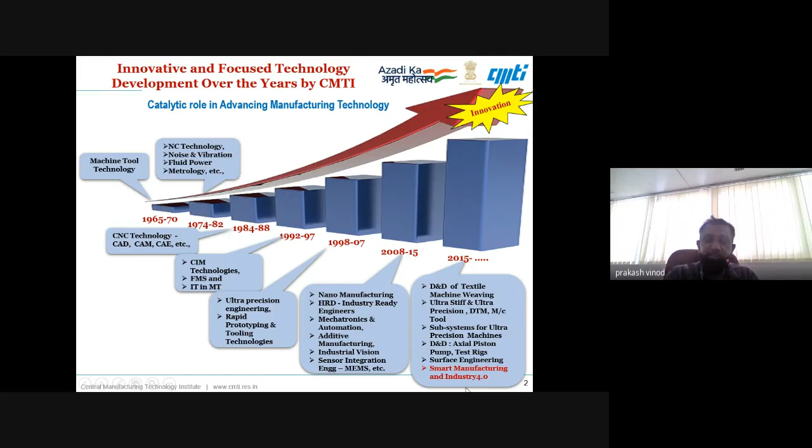To show how we are connected with smart manufacturing: our parent ministry, DHI, has a scheme called Samarth Udyog Bharat 4.0, which is part of their initiative for enhancing competitiveness in the Indian capital goods sector. Under the Samarth Udyog platform, they have set up 4 centers across India. CMTI Bangalore and IISc Bangalore are 2 common engineering facility centers of Samarth Udyog, with another center at C4i4 Pune, and another at IIT Delhi's mechanical engineering department. They are also supporting IIT Kharagpur to establish one more center, so we are becoming 5 instead of 4.

All these centers share some common goals and some specific objectives. At CMTI, we are setting up a smart factory with its digital twin for design, production, and performance monitoring of machines and assets in the domains of metal cutting, additive manufacturing, and sheet metal cutting. This factory is going to be inaugurated by the end of this year. Also, we have created a platform where development, testing, and validation of Industry 4.0 products and smart manufacturing solutions can be envisaged, and we have been doing many development works ourselves.

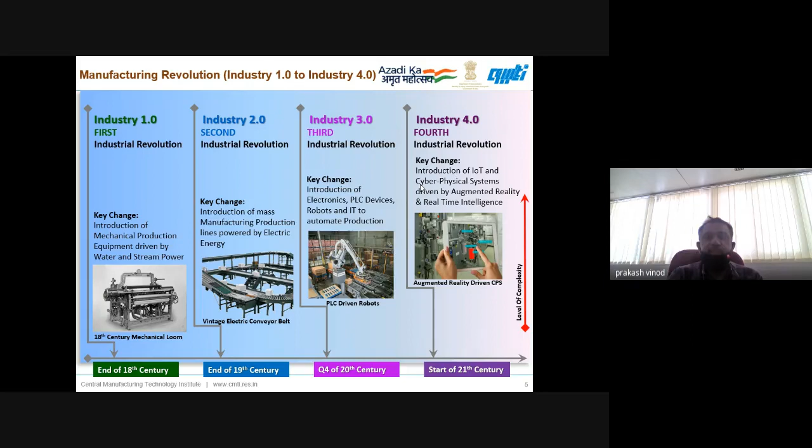So that is the thing, Industry 4.0. So what is smart manufacturing? If you look into that, what we are looking into is manufacturing, and the core of manufacturing is a factory. So within a smart factory, we have various machines and inspection systems helping us to do production, with a lot of integration among them. They are all connected to each other. That's horizontal integration, and all the assets are helping us do production which is more efficient and productive, with diagnostics and everything possible. So this is part of smart factory.

But smart manufacturing is connecting all the verticals of an organization, where the production systems are well connected with the design systems, well connected with the customers, well connected with the supply chain, and the entire thing. So in this process we get maximum benefit, where it's not only horizontal integration within the vertical, but also across the verticals there is integration. That's the way we are looking at it.

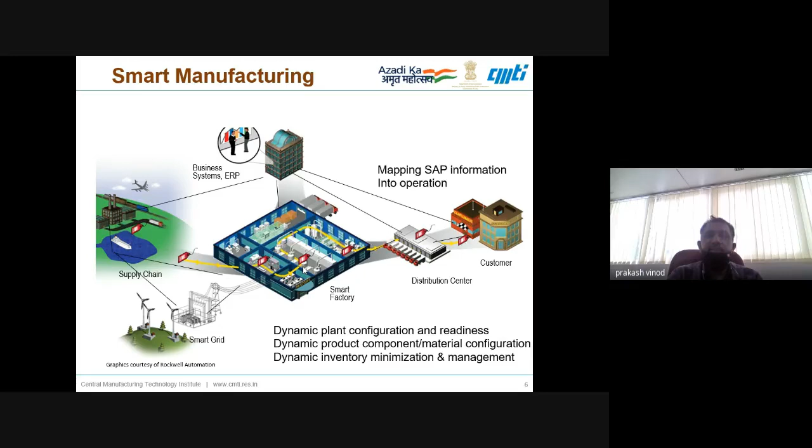So with smart manufacturing, we can achieve higher productivity, more efficient operations at lower cost, and also design-to-product turnaround time will be very less. That's the way we are looking at it, and with smart manufacturing we can face global competition. Now the arena is such that we have to face global competition, and this is possible through smart manufacturing.

Now coming to the subject I am supposed to talk more about, that is smart machine tools and machining. Let us have an overview of this. So what is a smart machine? A smart machine can be considered as an intelligent sort of device that uses machine-to-machine communication, and they are able to take autonomous decisions and solve problems without operator or human intervention. That's the way intelligent smart machines are envisaged.

Then what is a machine tool? If you see, a machine tool is one type of machine, right? But how is it different from other machines? Because in a machine tool, the machine will drive a cutting tool, and in this machine we are supposed to produce some components. So there is some raw material going into the machine, and some product comes out of the machine using a cutting tool driven by the machine. From that point of view, it is a slightly more complex machine.

So in this intelligent machine tool, what are our inputs? Basically CAD information, design information, or process information in terms of material and setup plans. And in this, we expect the machine, if it is an intelligent or smart machine, to take autonomous decisions and produce accurate components. It should also give information regarding the quality and output coming out, the machine condition, the productivity of the machine including downtime and setup times and so on. So everything should come out as output, which flows to the smart factory. That's the way we look at intelligent machine tools.

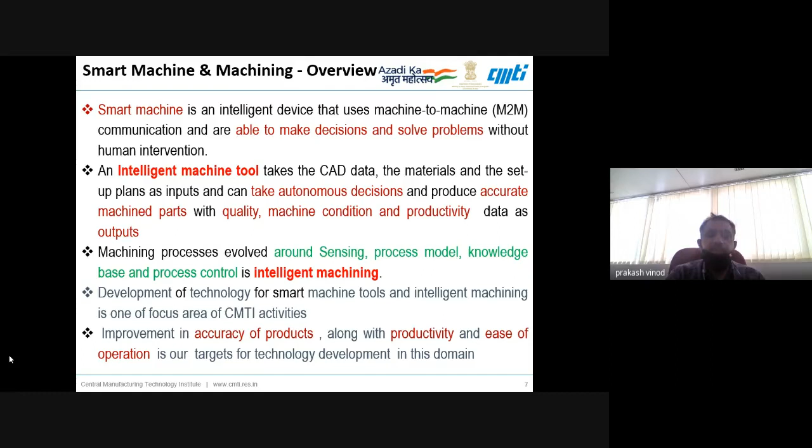So CMTI has been working in both areas, development of smart machine tools and intelligent machining, for quite a few years. What we are looking at is that not only should the machine be accurate, even the products coming out of the machine should be accurate, and the entire machining process through the machine should be productive, as well as easy to operate. Nowadays with IoT and other things, you can also make the operation quite user friendly. So these are all targets of our technology development in this domain.

So now let's see some of the features of smart machine tools which make them unique from other normal machine tools.

Including some CNC machines, a smart machine tool should adapt to changing conditions. Suppose while cutting, if chatter comes, it should be able to adapt, and either correct it itself, or give some alarm or notification to the operator to make some changes. That is the way we are looking into adapting to changing conditions.

Then another feature is that smart machine tool invariably should have open architecture CNC. Why is it required? And also sensor interface, why is it required? Because in smart machine tools, we need to sense the machining processes, and we may require many sensors, so there has to be an interface.

Some sensing is possible through CNC control itself, but if you look into the state of art technologies, in modern days machine tool OEMs will provide CNC machines with some outputs connected with power, torque, or temperature, but not considering the processes. If you want to measure cutting forces, vibrations, or acoustic emissions coming from the machining process, they may not provide that. So you must have some interfaces also, and we are looking ideally at that.

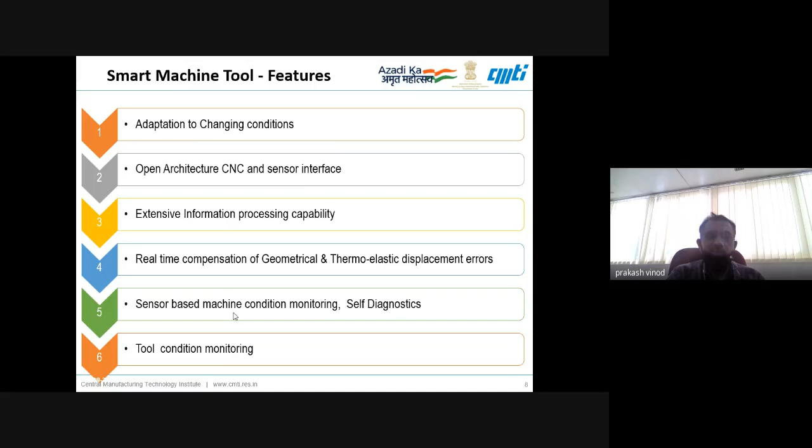Also, machine tools, apart from machine subsystems, will have cutting tools, and that is very important. If a cutting tool is becoming blunt or has more wear, it may lead to errors on the component. So cutting tool condition monitoring also should be one of the features in smart machine tools.

Vibration and chatter is invariable if you see in machining processes; every machine tool will have some stability zone. Sometimes if your tool is blunt, then you may not get the stability zone, and you're not able to work in that. So we should be able to work without spoiling the component, so we should have some means and mechanism for vibration and chatter control.

Then process monitoring, which I was talking about just now, intelligent machining based on the sensor should be possible in the smart machine tool, which is invariably not found in most of even modern day machines coming from world-class OEMs. This sensor-based process monitoring is still not fully implemented in state-of-art machines also. So it is slowly an emerging area where a lot of people are working, and I think slowly it is going to come.

Now, if you want sensor-based process monitoring and process control, we should have some models for different machining processes, where that sensor is basically input to those models, and these models are already trained.

It has knowledge, so that can help us in process control. So these are one of the features of state-of-the-art machine tools. So on-machine metrology: in fact, in machine tools we are making components, right? So generally, after the component is produced, it goes for inspection offline, and then sometimes if it needs to be corrected, it comes back to the machine.

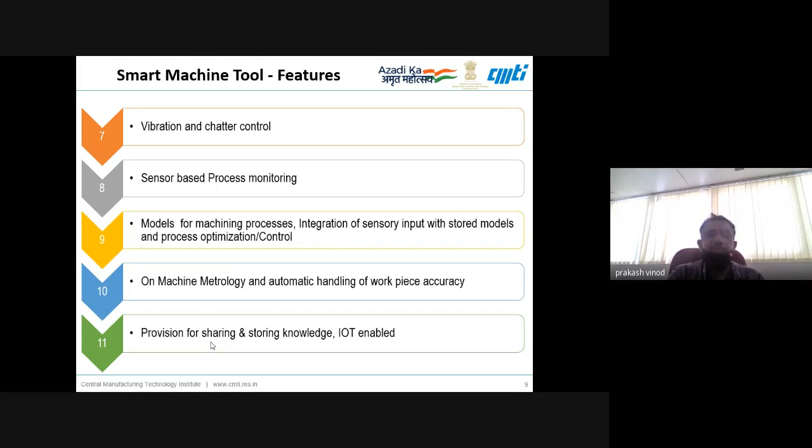So people are looking into analytics which is useful for machine tools to give real-time corrections at the edge only, that is, very close to the machines. So those features, edge controller and edge analytics based processing, should be possible near the machine. So that's the way we are looking into that.

Now let us see the smart machine tool concept, how it has come. It is not that the smart machine tool is totally different from a normal CNC machine. It is basically an add-on. So if you look into a normal CNC machine for one particular axis, maybe the x-axis, it is driven by servo motors, there are servo control drives, and there is a CNC system. So it is a closed loop system.

So if any movement is taking place for machining, it is sensed and feedback is given, and if a correction is required in positioning of the axis, that is done through the servo control. So this is servo-controlled CNC machine tools. That's the way we have been working. Now, if we are looking into a smart machine tool, we look into some more features. So let us see what features we have to add.

Now, not only are we making the machine movements closed loop, we want to make the machining processes closed loop also. So we'll have cutting processes, and in cutting processes we'll have different sensors, like cutting force, temperature, vibration. And we can also have sensors directly mounted on machines, which can be used for diagnostics. And if we are sensing the processes using cutting force and temperature, we can do process control.

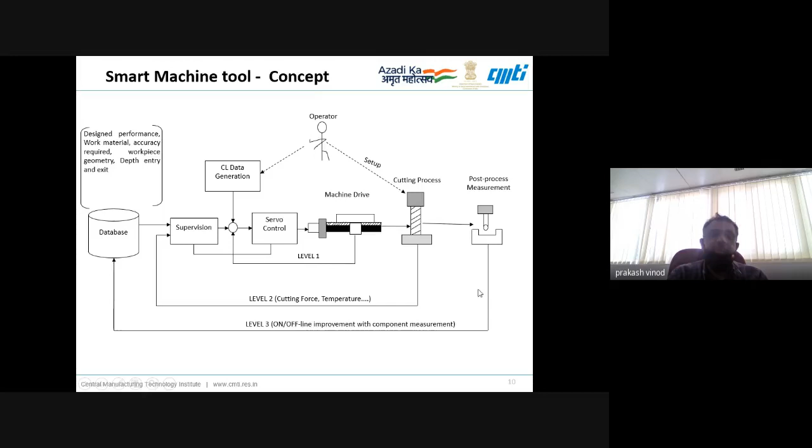We can have models which are trained and can work in real time based on the knowledge they have, and help us give corrections to the basic CNC machine. And we can also look into component measurements, the quality of the components after the process is over. On the machine itself we can check the quality, take that input, and if any corrections are required, we can look into that. So it is basically an add-on of more closed loops into the basic CNC loop. That is the way we can achieve the smart machine tool.

Now coming to CMTI, I will start with one case study, and then we'll discuss what we have been doing. CMTI developed a smart ultra precision machine tool we call the intelligent ultra precision turning machine way back in 2013. This machine itself is a very high precision machine meant for diamond turning and producing optical quality surfaces on metals. But at the same time, we also developed many technologies which make the machine tool smart. So let us see what those are.

So the first one is machine error. I was mentioning that the machine will have inherent errors connected with positioning of various axes, geometrical errors like straightness, pitch, yaw, and roll, which make the machine inaccurate. The machine will also have thermoelastic displacement errors, which occur because of temperature changes, because machines are made mainly from steel alloys. So invariably it has a comparatively higher coefficient of thermal expansion, which leads to thermoelastic errors.

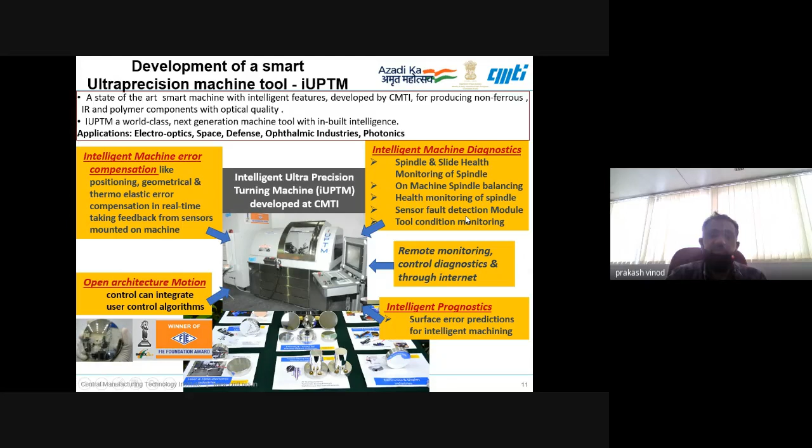The first thing we did, we developed a module, again an AI/ML based technique, for surface error predictions for intelligent machining. I will be discussing these in the coming slides. Now, if you look feature-wise, we had an ultra precision turning machine, and if you see some of the features, you will find them very unique, not found in other machines. Like the type of drives, linear motor driven, aerostatic spindles, and the machine structure is made of granite. Of course, the slides and other things are made of metal, but the machine is isolated.

Many sensors are mounted on the machine. Job holding is basically through vacuum. The coolant system is also unique; it is mist coolant. So many features are there in that machine which make it a high precision machine. But apart from that, let us look into the intelligence part.

As I mentioned, we can do real-time machine error corrections and real-time diagnostics. Some prognosis using intelligent machining, and even some prognosis of the tool, particularly tool life, we have done. And of course, the machine has features for active vibration control and adaptive control. Then I will just quickly go through how we have done these works.

The first part is positioning error or geometrical error compensation on this machine. These positioning errors will occur in your linear axes basically. This is a hard turning machine, and the next one is our diamond turning machine. These will invariably have two axes, X and Z, and sometimes the spindle will also be a C axis. So we have to look into the errors of all these axes. Let us look into the error of a linear axis, where we can correct this positioning error.

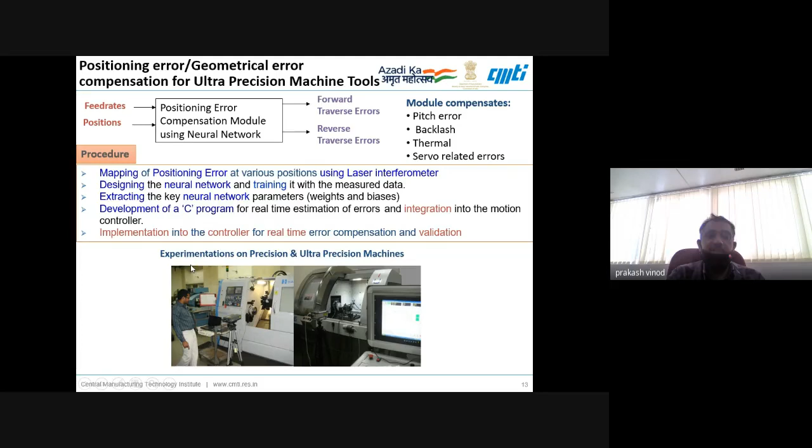It can start predicting the errors, and that can be corrected using a C program, which can be integrated into the motion controller. So that is the way we are looking into that. We have done it successfully, and we have achieved some results, which I will be sharing with you in the next slide.

So let us see. This is geometrical error correction of one of the axes of this machine, in real time, using basically an NN-based algorithm. The neural network is one of the artificial intelligence algorithms which we can use for industrial applications.

So let us see the linear error, that is the positioning error. If you see the blue one, it was before correction. Of course, it is an ultra precision machine, so it was around 4 to 4.5 micrometers for that stroke of around 200.

Now, after the development and implementation of the neural network-based algorithm, we are able to achieve less than 100 nanometers, less than 0.1 micrometer error in position. This is real time in this scenario, and it is after validation.

Like that, the machine will have geometrical errors like pitch, yaw, and roll. These are angular errors. Apart from that, it will have straightness error in the vertical and horizontal direction. Everywhere, the blue one is before correction, and the red one is after correction.

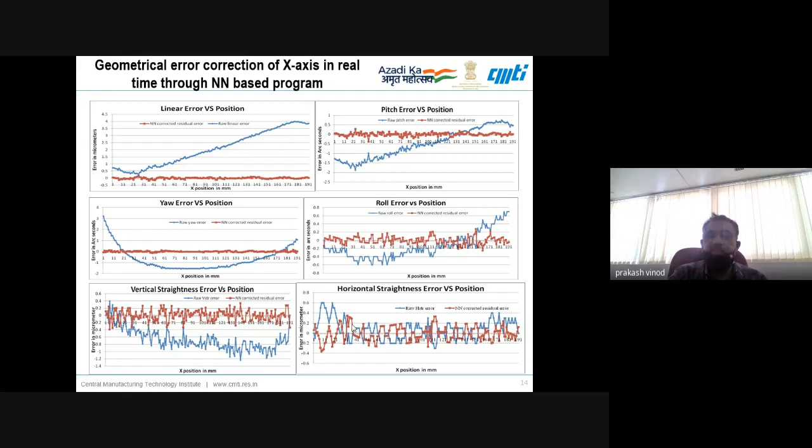So if you quickly look into that, not only the linear error, but also the angular errors like pitch, yaw, and roll, and the straightness error in horizontal and vertical direction, with the implementation of these algorithms in real time, we are able to bring down to hundreds of nanometers level. So that is one of the achievements we have done in our machine.

Now let us look into thermoelastic errors. Thermoelastic error is a big problem for most machine tool OEMs, particularly in a country like India, where the temperature changes from winter to summer and place to place. It goes sometimes from 0 to 44, 45 degrees centigrade. With this large variation, you can expect the machine will give you inaccurate parts in different seasons, different conditions and different places.

Same machine. So we can definitely correct it, and this is one of the techniques which is very useful in real time. By using electronic means and again artificial intelligence and machine learning techniques, we can develop an algorithm, and in real time, based on the temperature of the machine at a few places, not at all places, we can correct the error occurring between tool and job, and we can get the results.

So if you look into this flow chart, what we need to do is a lot of experimental work initially to identify which are the correct locations. We have to do temperature mapping, and with temperature, we have to do mapping of the thermoelastic displacement during experimental work.

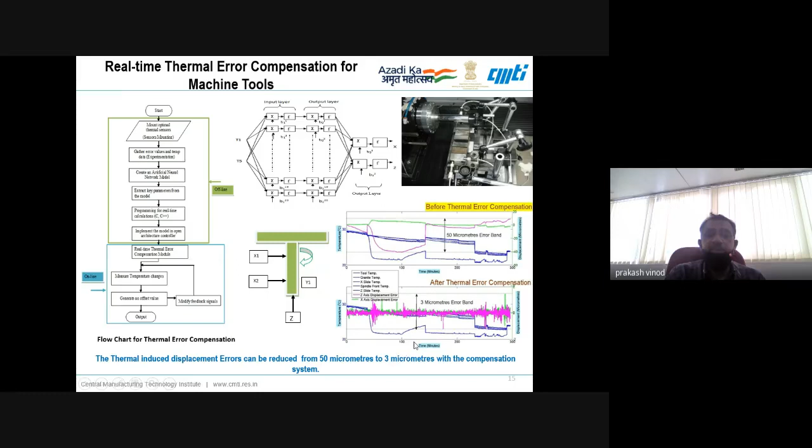We have not only validated this, we also implemented it into our machine, one of the machines. Let us see the one component where the radius we are machining, some spherical cup sort of thing, on a continuous basis.

The radius tolerance was only 1 micrometer. 3.288 is the basic dimension, and tolerance is 1 micrometer only. The form error of this spherical shape was 1.2 micrometer. So what used to happen?

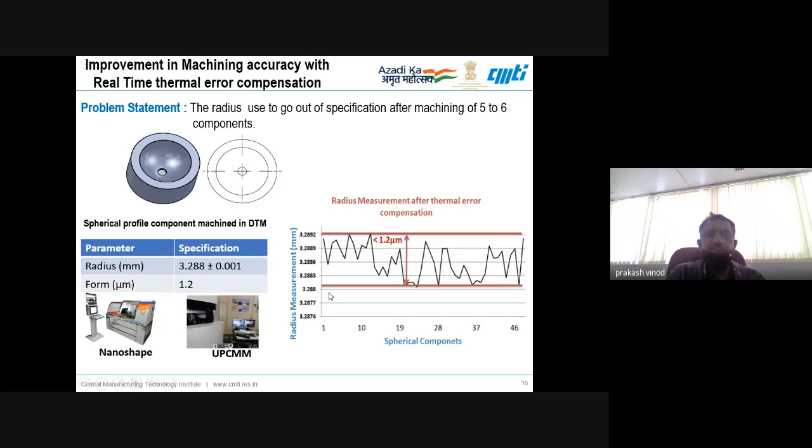The radius was changing. After 5-6 components, it was going out of tolerance before implementation of this thermal error compensation technique. Once we implemented it, as the thermal errors come up beyond some threshold value, correction takes place, and it maintains that. So after 46 components also, you get the same band. That is the validation, this real-time experimental work after implementation.

So the next one is monitoring of machine and diagnostics. That is very important in smart machine tools. Machine tool will have elements like spindles, slides, and all. These need to be monitored in real time, the conditions and all. So how can we monitor?

The best way is that you can monitor using a vibration sensor. If you have a vibration sensor, you can find out the real-time vibration. Of course, you should also have some reference levels. You can compare these vibration levels with the reference level, and if the values go beyond a certain level, we can have alarms to the operator, and if we work further on that, we can predict the life of the machine element. So prognosis is also possible, not only diagnostics.

So that's the way we are looking at it. We have developed some modules where, for each measurement point on the machine, we have a reference level. When the machine was good, we recorded a reference level, meaning it could be a single value parameter like overall vibration level, or it could be a vibration spectrum itself in a particular band. Those reference things are there with us, and in real time we have vibration sensors mounted.

With that we are able to get information in terms of real single value parameters like overall values, crest factor, or peak level. These type of things we get, and we compare with the reference values, and we are able to tell whether it is good or bad. Fortunately for this, we have some standards also, international standards, which tell when it is good and when it is bad. That's why we are doing that.

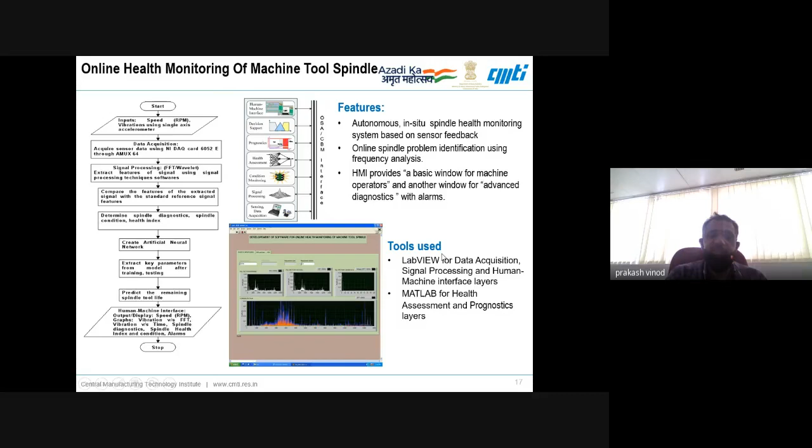Now coming to this, this was regarding very smart state-of-art machines developed by OEMs including CMTI. But what about machines which are already there? I think this is one of the tasks given to the Samarth Udyog centers. We have plenty of machines from industry 2 generation and industry 3 generation. So how to make them smart? CMTI has done a lot of work on that.

So what we have done, let us see one machine. It is a 5-axis VMC from the 1970s, somewhere 75 or early 80s. This machine was procured at CMTI. It doesn't have a controller, a very old CNC, so you cannot tap any data or information from the controller. It is doing closed loop operation fine, but you cannot take any information out of that.

So then what to do? In that, we have incorporated external sensors like temperature, vibration, pressure, energy and all this. We have also put a vision-based inspection system for quality inspection. With that, we developed edge-based analytics and cloud-based analytics, and we created a cloud-based dashboard.

There we can monitor the thermal behavior, spindle health and axis health, that is machine health, temperatures, and energy. Energy monitoring is also very important because nowadays it is not just useful for productivity, it also gives a lot of information regarding the process.

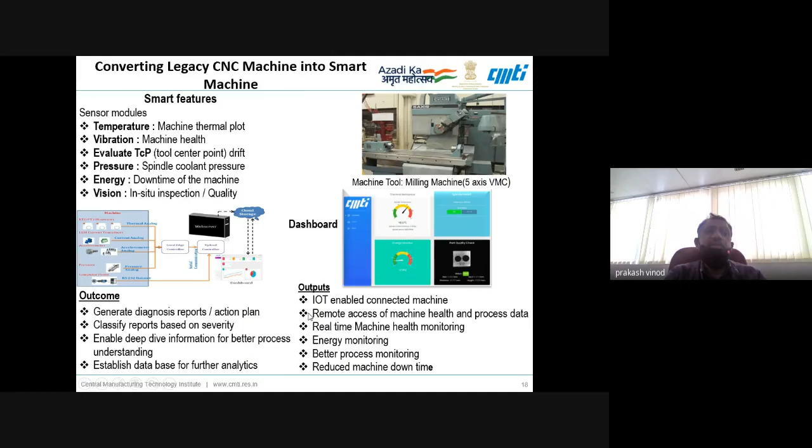We also looked into not only metal cutting but additive manufacturing. A lot of additive machines are there which are again, we can call, some sort of legacy because they are not IoT enabled. So how to make them IoT enabled? We have done some work in that area too.

We created some apps and all. Using the app, through cloud, we can upload our program G-codes for the manufacturing process, for additive manufacturing. We can do that, and also monitor the machine through the cloud. So that's all a possibility, and we have done all this.

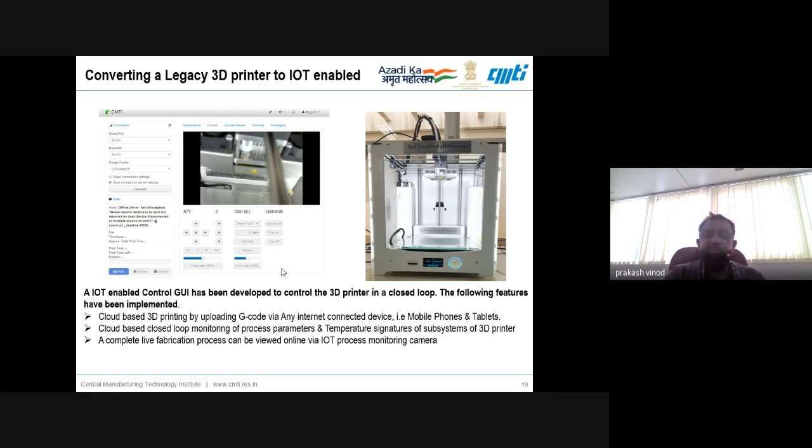We have added some sensors also, and we can monitor the process through vision systems also. Apart from monitoring process parameters like temperature for additive processes, we can see some dashboard for the 3D printer. It's an FDM printer basically, so it's like a technology demonstrator.

We have done that. We are able to maintain and monitor temperature and humidity inside the chamber, and temperatures at different places and all. So this thing we are able to do.

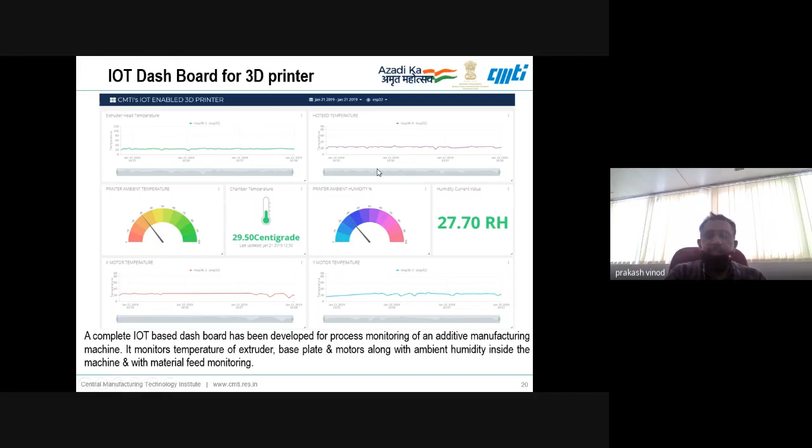Now coming back to this, what is the role of this smart machine in a smart factory and Industry 4.0? Let us see. When we look into a smart factory, there is networking of people, and as I told you, the machine and resources, all cyber-physical, this is all fine. But the core of this smart factory is the machine.

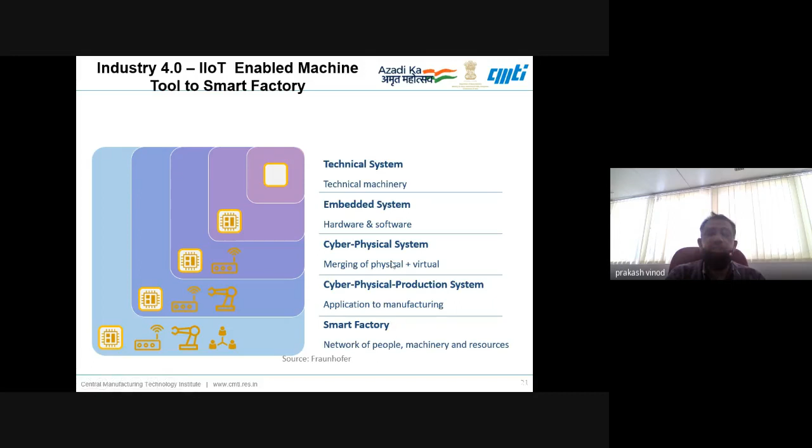When we talk of a machine, we have to look into a physical machine, a virtual machine, and see that the machine is IoT enabled. It should give information about what is happening on the machine and also why it is happening, and it should be able to do adaptive control and prognosis. This is the core of the machine tool, the core of many smart factories based on metal cutting.

So this is the first part, I think, regarding the smart machine tool. Now later I wanted to talk on intelligent machining. If anybody has any questions, I can take a break and answer the questions.

Hello. Hello. Yes, Dr. Prakash. Yeah, yes, I think if anybody has any questions, I can take up on the machine tool, smart machine tool, yes sir, or Industry 4.0 and smart manufacturing, and then I can proceed towards the machining, intelligent machining. Sir, there is one question from Dr. Ramchandra Krishnaswamy. Yes, sir, yes, sir.

How is the online balancing carried out while a machine process is in progress? So actually, sir, I think I have not given much detail. What we have developed, it is not that while machining is happening, the balancing is done. It is before machining, using the module. Once you take a machine tool, you will have some fixtures, a spindle and some fixtures, right sir, or some job also you can mount on that. So before you start the machining process, we can check the unbalance on the machine using the module, and we can check the unbalance and correct it before the cutting. Yes sir, hope that answers this.

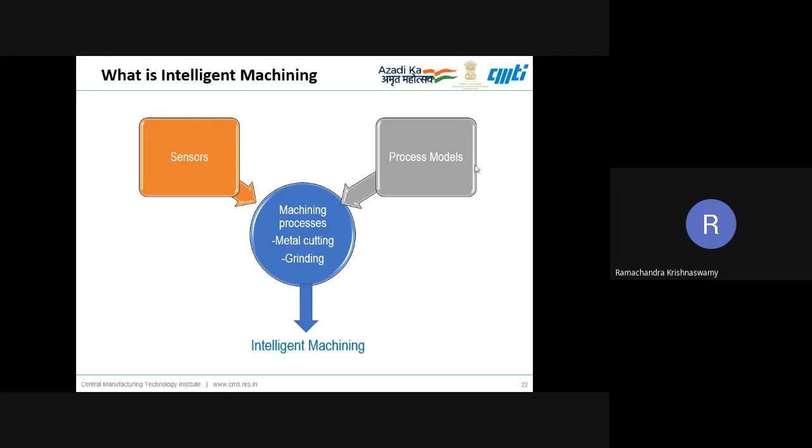Professor Ananthasuresh has a question. Sir, please. So Dr. Prakash, I think it was a very lucid presentation. You started from the very basics about defining Industry 4.0. That was very nice.

So I have a question. When you look at Industry 1.0, 2.0, there was a very clear demarcation. 1.0 you said was steam power. Second is the 2.0, electrical power. So can such a clear, crisp distinction be made between 3.0 and 4.0? Okay, that is the first question.

Yes, definitely sir. So the clear distinction is that in 3.0, machines are basically autonomous and automatic, but they are standalone. Standalone in the sense they need not be connected to each other. In Industry 3 also, a robot was assisting a CNC machine. But if you look into Industry 4, all the assets, the robots, the machine tool, inspection systems, CAD, CAM, they are all connected, sir, well connected.

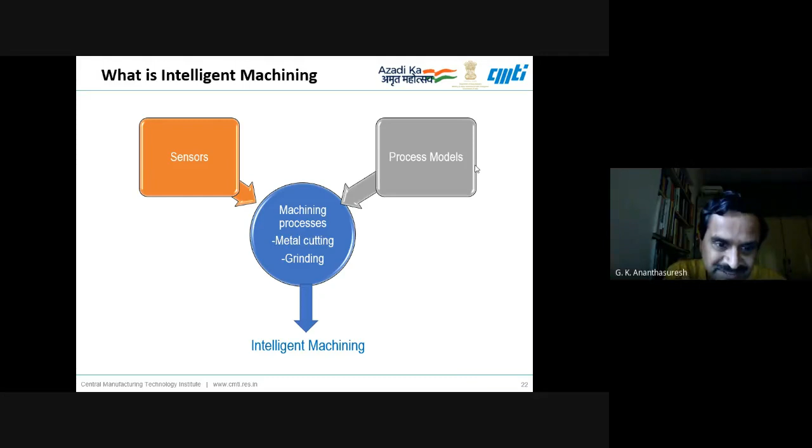In a similar way, I think that change probably will be coming, but right now, between 3.0 and 4.0, even though we can explain in detail what the differences are, I think probably we need some more time for seeing this very clearly. So to specifically ask a question, if you go to your slide number 10, where you had a flow chart, right? Slide number 10, if I noted it correctly. Yeah, I will come back to that.

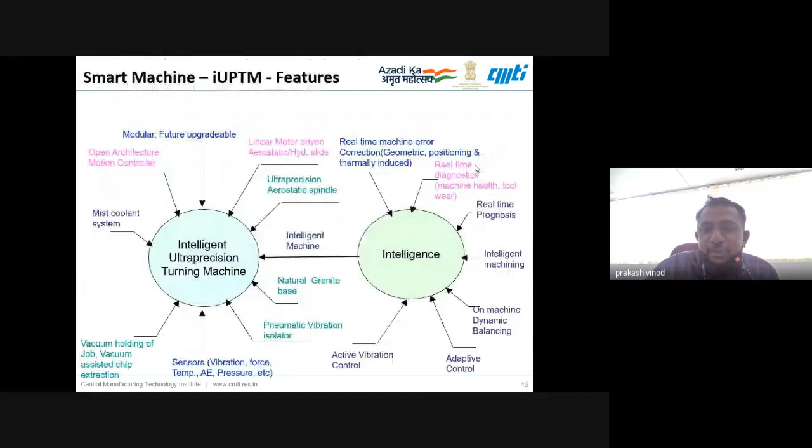I think so. Now slide number 10 - if you were to make it a 3.0 type system, what connectivities will be disappearing from here? This is now 4.0. So for 3.0, which ones will go away? The cutting process and then process monitoring will go. This servo control and CNC is level 1. Level 1 will still remain, sir.

So this cutting process part will be disappearing. Yes, sir, entire cutting process monitoring, including the model, will disappear. And also the measurement on-machine methodology will disappear, sir. The database also, I think, is disappearing. Most CNC machines in generation 3 will not have a big database or any supervisory model. It's basically a closed-loop CNC, where it can correct axis positions automatically. That's the way it works, sir.

Is it fair to say that cutting process modeling was not done until 4.0 came in? That's what everybody says. But cutting process was being monitored, and post-process measurements were being taken. To clarify, sir, although we wrote cutting processes, at level 2 we are not only monitoring cutting processes, but also monitoring machine parameters like vibrations and temperatures. That is not shown very clearly here, but basically at level 2, we are monitoring the cutting process as well as on-machine monitoring. So both are going, sir. In case of Industry 3.0, that monitoring of process as well as machine diagnostics is going away, sir.

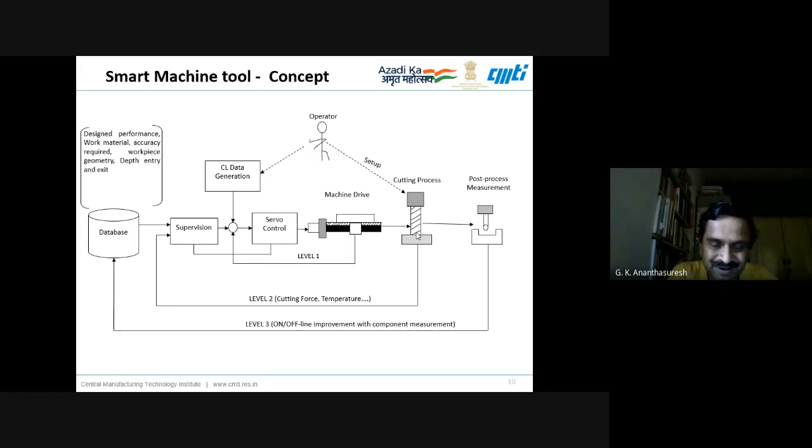Okay, again, I think some of these were done. So that's why I'm saying between 3.0 and 4.0, the distinction is a lot more gradual, elaboration-wise. It's obvious. You're very much right, because if you look into 3 and 4, in 4, 3 is going to be there by default. So it's gradual - it's not like the big difference you see from 1 to 2, steam to electrical, and electrical to electronics. But here it is electronics to software. That's a very crisp way of saying it - yes, software is more, all electronics. Now 4.0 takes software. True, sir, true.

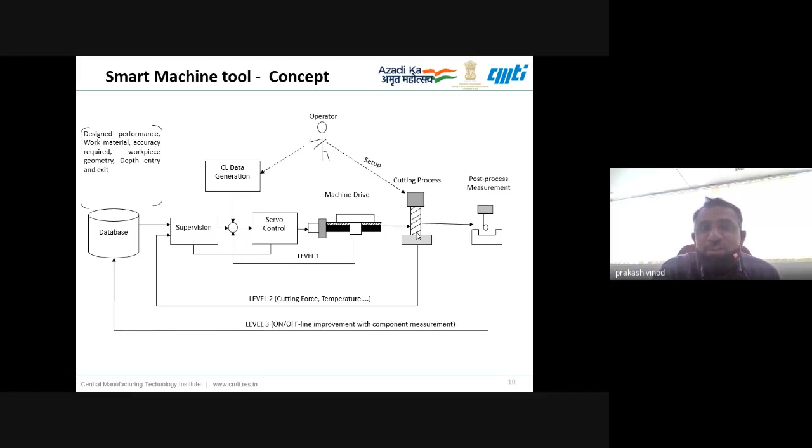Okay, thank you, very nice. Thank you, okay sir. Yes, sir, any questions? No, sir, no one has kept it in the chat box.

Then I will come to the second part, which I think is much more futuristic. Just now I was talking to Professor Ananthasuresh regarding intelligent machining. If you look into the first part, smart machine tools and diagnostics - to some extent, cloud-based techniques and analytics make it possible to see what is happening on the machine elements, very well. Nowadays machines are coming as Industry 4.0 compliant machines. If you buy from OEMs even in India, people are coming out with machines where you can see what is happening in the machine, definitely in the machine elements. But if you look into the process - what is happening in the cutting processes - that is still not fully implemented in industry.

So it's quite interesting from an academic point of view, and a lot of work is happening in academia. I'm just putting some things that CMTI has done - more work is happening in academia. So now let us see what intelligent machining is.

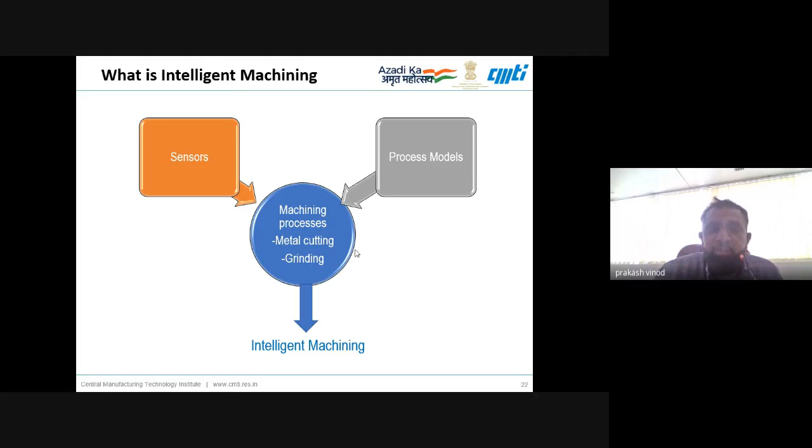Let us see, it is a big challenge for metal cutting R&D guys. So now, why actually is it so difficult, and why is intelligent machining required? We will see both. Machining processes, as on date, are open loop as well as stochastic.

Sometimes suddenly there will be chipping of the tool and all sorts of things, tool wear and all. If you look into it, you will find that these are basically non-stationary. It's not really a stationary phenomena, and there are many things resulting in affecting the machining processes.

So it is not only the tool, it is also the job — the job hardness, uniformity in the hardness or composition of the material, also the tool, and the machine itself — machine vibration, spindle vibration, axis vibration, many things, and even coolant and lubrication. So many things are there which are finally making the product, and that's why it is much more challenging.

Secondly, why it is required is that machine tools are very expensive, and nowadays in industry 3.0 itself it was automatic. Now with IoT and all, it is much more a smart factory, and people are talking of even integrated inspection on machine, metrology, and all sorts of things, with very less human intervention. People are talking of operating factories without man, smart factories. So this is why it is very important.

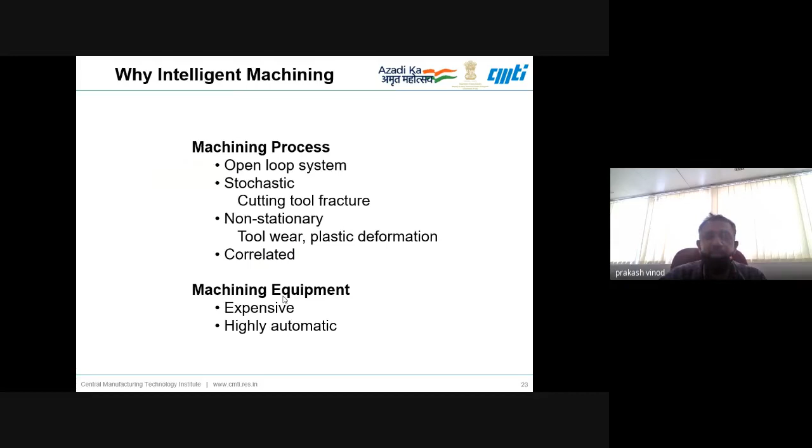So some of the issues we look into when talking of intelligent machining, for any type of metal cutting: wear of tool or grinding wheel, fracturing of tool, plastic deformation occurring in the tool itself, temperatures occurring at the tool and job interfaces, vibrations, chatters, chip formation mechanisms, and thermal issues which are also affecting the machining process.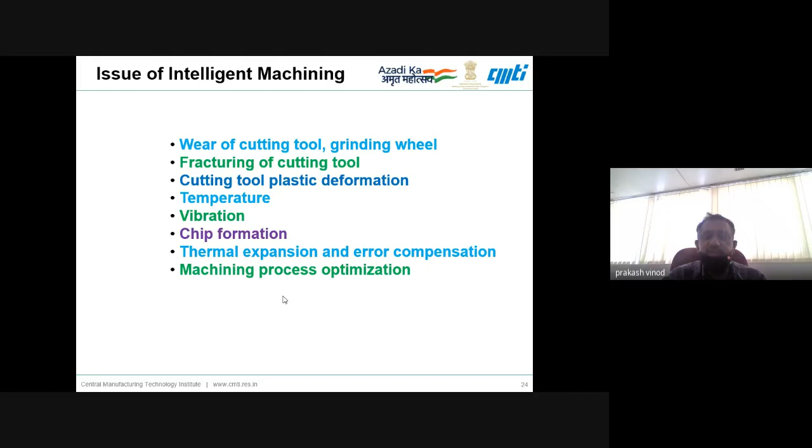Finally, we have to look into the aim of all this — intelligent machining — to optimize the machining processes. Also, we should be able to predict the prognosis of the process. That is the aim. Now let us look into the basic things.

I am not going to talk much in this area, just a few basic things regarding what sensors we can use for intelligent machining. Now if you see, cutting force is the most common sensing used in metal cutting to sense the process.

So there are other sensing elements or basic sensors like force sensing, vibration sensing, acoustic emission sensing, and sometimes some processes you can monitor using vision-based systems also, or displacement measurements, and sometimes current, voltage, and power.

Nowadays, as you have seen, a lot of solutions are coming in using monitoring of power, meaning energy monitoring. I think invariably we have to do it as part of any Industry 4.0 solution, because that will give you the power consumption. You can optimize the power. Power is very costly, so invariably people do energy monitoring.

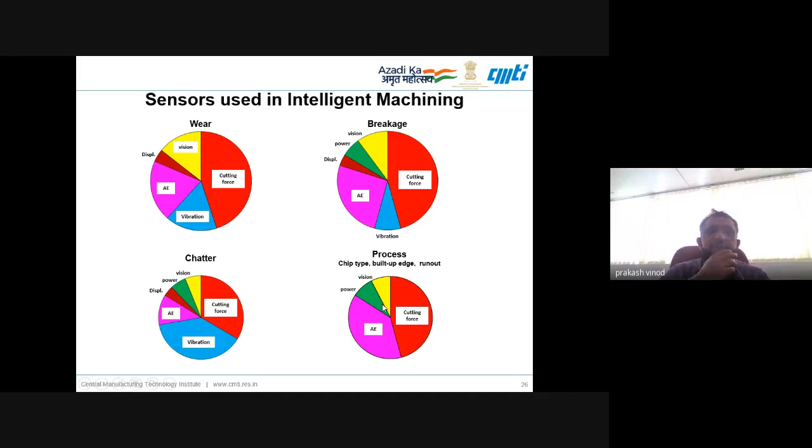So now let us see what are the basic types of errors, a few errors, and which sensing will help us. If you look into tool wear monitoring, the modules which people develop, the majority come with cutting force, and some come with vibration and acoustic emission, quite a good amount, and some are vision based, where they can directly measure the tool wear. So some solutions are there where people are working, or they have come out with some prototypes.

Now when it comes to chatter, chatter is easily detected with vibration. So vibration and cutting force are the two important parameters by which we can look into chatter. When it comes to tool breakage or chipping, as we all know, if a tool has some chipping or breakage, the cutting force will suddenly change very drastically. So cutting force based models are much more popular.

When it comes to some high-end processes, like built-up edge formation or chip formation, cutting force and acoustic emission are found to be much more useful than other methods. Of course, everywhere you can see power; I think this is slightly older, from a few years back. But nowadays, even though they are not finding a foolproof solution, people are trying to give solutions based on power for all these issues.

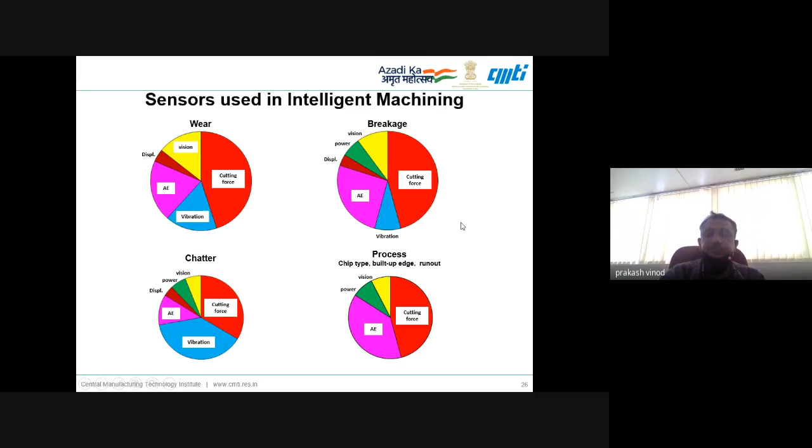Okay. Now, coming to the development of a module for intelligent machining. I've tried to make it very simple for people to understand, but it is really difficult if you want to achieve good results. So let us see how we go about intelligent machining, how we are making it a closed loop system. Basically, as usual, we have to monitor the process using sensors. Once we are monitoring using a sensor, like a vibration sensor for example, some data will come.

But the raw data itself we cannot take. The reason is that we are trying to monitor the vibration from the cutting process, but vibration can come from the machine itself. There could be a bearing problem or some other issue, or environmental vibration can also come in. So we must do some filtering. We should know filtering techniques very well and apply them.

Then from the information that comes after filtering, we have to extract the features. The basic raw information is going to be very huge, so we cannot manage that for proper learning. So we have to find out which features can be used from the entire raw signals, and use them in some sort of ML-based or AI-based modules we develop, and then do training using the information extracted through feature extraction from the data. Then we have to do some learning.

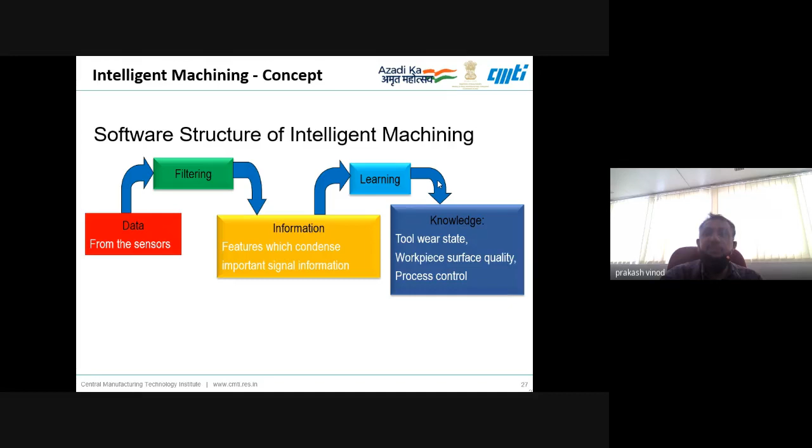It can help us to either change the cutting conditions, or at least it can give us some information regarding process prognosis, some alarms, some dashboards where we can know the wear, we can know surface quality; at least we can see and visualize. Later, once we are very sure that things are working well, we can use it for adaptive control automatically. So we have to be very careful.

So the same thing, there is a basic manufacturing process, turning here, and so on. Some signal will come, then we'll have to extract the features, and based on that we have to do some decision making, which is AI/ML based, and then find out which are faulty, which are normal, and that is the way it works actually. Then we have to put it into the control system, and then it works. So this is the general structure.

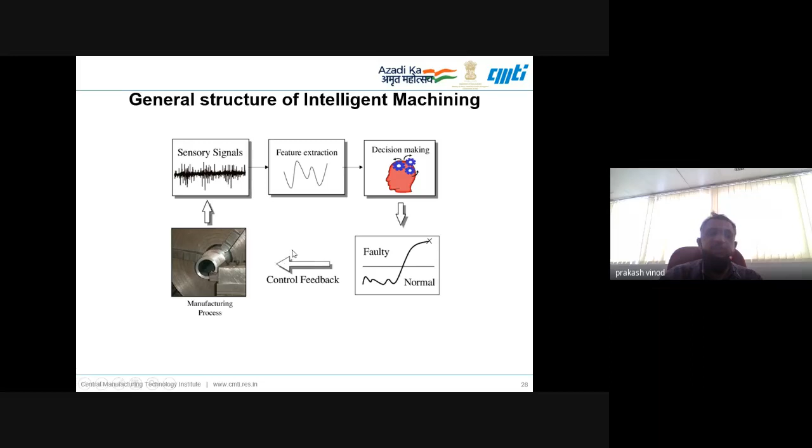It's very simple to make, but once we are looking into specific processes, if you want to monitor or predict the type of wear, or some tool life, or process quality like surface roughness, it is very difficult and challenging to prove and validate that it works in all conditions.

So now I will just take one example which CMTI has tried to do. Let us see. We tried to predict the surface roughness in the diamond turning process. What we did, we did some design of experiments and all, which I will not go deep into. Basically, we had a diamond turning machine, our intelligent ultra precision turning machine.

We have fixed the workpiece size, and some targeted surface finish. We are planning 10 nanometers, and the speed range of the machine is 50 to 7,000 RPM, and the load capacity. These are the basic specifications of the machine. Then we selected a particular type of shape, which is flat, and the material is aluminum 6061 T6, the optical grade aluminum.

So we tried to develop the module for predicting the surface finish. The tool also we fixed, a monocrystalline diamond tool with 0 rake angle and nose radius of 3, based on some literature. Then we started measuring the vibration in 3 directions, X, Y, Z. We were monitoring the vibration from the tool side, not from the spindle side.

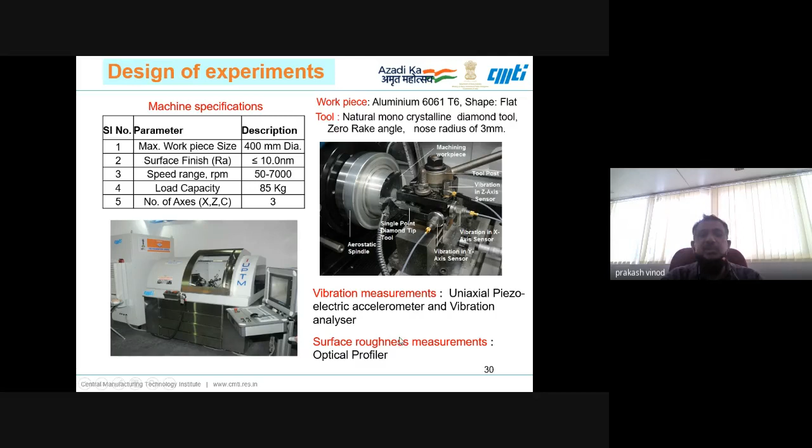And then finally surface roughness measurement. Based on the design of experiments we have done a number of experiments, and the surface roughness measurement was done using our optical profiler at CMTI. So let us see what is the input and what is the output.

The independent variables are the cutting speed, feed, and depth of cut, and also the vibrations which we are measuring in the tangential cutting force direction, feed direction, and thrust force direction. That is Vx, Vy, Vz, vibration only. So these 3 plus these 3. And finally we are getting a component and surface finish.

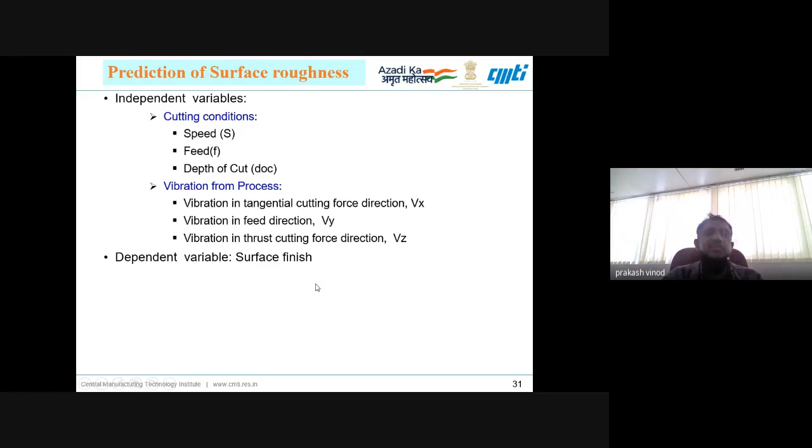This information we have used to try to predict the surface roughness using 2 methods. One is multiple regression analysis, another is an artificial neural network based module. If you look, the blue one is the real. After validation and implementing this into our machine, we did 25 further experiments, and in those we compared what we are measuring and what we are predicting.

We tried to predict using two techniques, regression analysis and ANN. We found that the ANN-based model was giving a slightly better fit to the measured one. The error was around plus minus 6%, whereas in the case of MRA it was around plus minus 12%. So that's the way the goodness of fit was there. Reasonably, it gave a good indication that it is possible.

But again, as I told you, it is for one particular shape. If the shape is changing, the cutting tool is changing, and the material is changing, then we have challenges again. So we are still working out how to make some sort of robust model for diamond turning itself, and then comes the turning of other processes. So it is quite challenging.

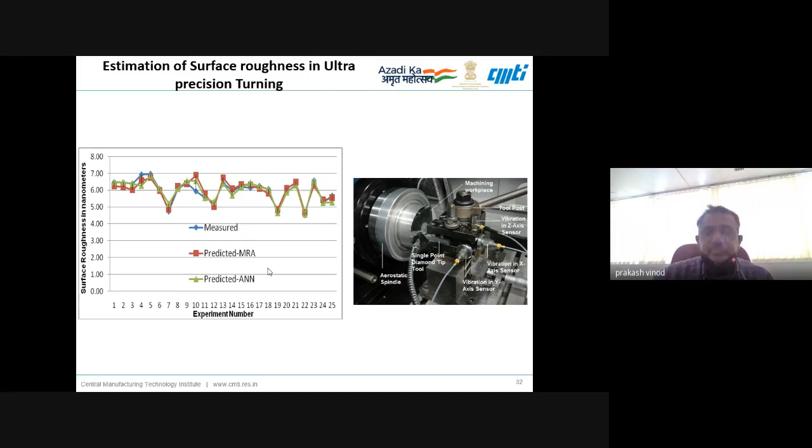To make a universal model for turning alone is a big challenge, considering the type of tool, material, machine, and other parameters. So this is our experience regarding prediction. But if you have a specific job and a specific cutting tool, then we can do it. If you are changing the job shape and tool, it's much more difficult, so we are still working on that.

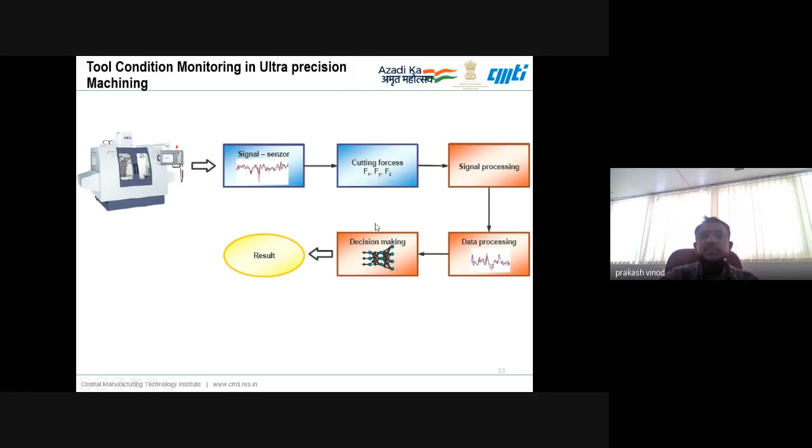Now coming to tool condition monitoring. That is comparatively easier than process prediction. We have tried to do it using cutting forces in CMTI, as well as using vibrations. We take raw signals while cutting, while the process is going on. It could be force, vibration, or acoustic emission. Then we do signal processing and data processing for feature extraction, then machine learning and training of the AI-based models, and then finally the result. That is the way we are doing tool condition monitoring.

There also, we tried to do something based on vibration and force. What I am showing is force. In this area also we used a neural network. We had inputs like cutting speed, feed rate, depth of cut, and we were also monitoring cutting forces, and the output was flank wear of the turning tool. Then we did neural network training, and we could predict the tool wear.

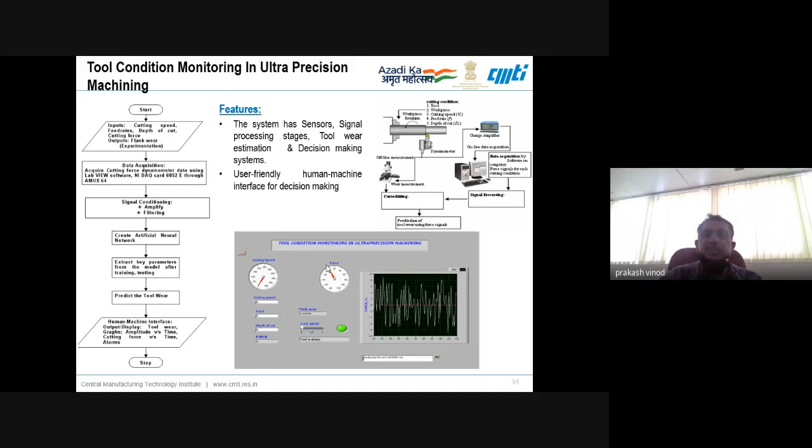We tried to quantify the wear, and also qualitatively connect it with the life, whether life is remaining, along with some remarks. So this module we also developed at CMTI for tool condition monitoring, particularly in ultra precision turning operations. That is the way we have done it in CMTI.

Now, what benefit are we getting if we have smart machine tools and intelligent machining? We can get higher efficiency and productivity. Obviously, we'll get more accurate components, and we can also reduce downtime, because we are able to do diagnostics and monitor the losses of overall equipment effectiveness, OEE. Why this OEE is lower, we have done some work which I will tell you about at the end.

With analysis of OEE losses, we can find out where there is scope for improvement. Whatever modules we have developed at CMTI for overall equipment effectiveness, we have also looked into the micro analysis of those, particularly for metal cutting, to find out why the losses are occurring. OEE is connected with quality as well, so we looked into all the aspects and tried to do a few things.

Then the second thing is machine accuracy. That is a place where we are well connected with machine tool OEMs.

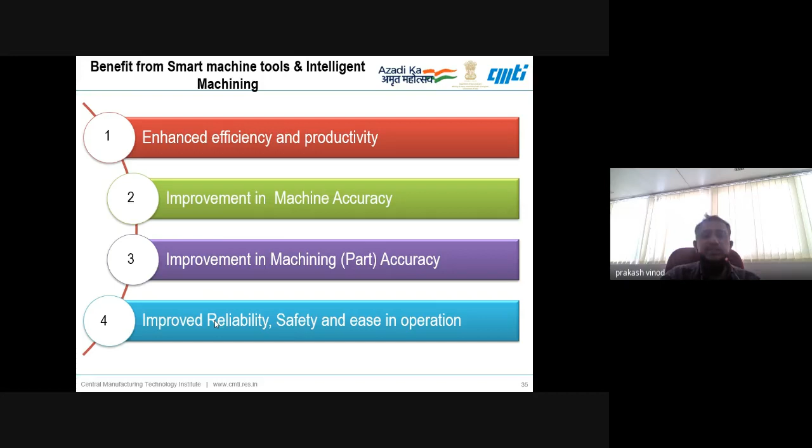So when we are looking into smart machine tools, we are addressing that aspect also. Now let us see our smart factory coming up at CMTI, where we have all types of machines. You can see the job comes in and gets checked with an RFID tag.

Based on that information, it identifies which program has to run on which machine. Then the AGV and robots load these components on different machines, and the operations take place based on the part tag.

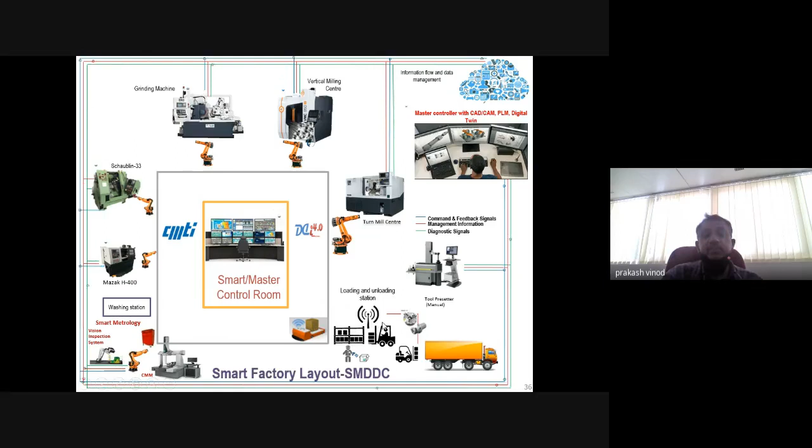Then it goes for metrology, either on-machine or off-machine for some parameters. And if everything is good, then the component is ready for use. So that is the way we are looking into it.

So this is a very simple way of looking into a smart factory - the part comes, gets tagged, gets identified, and then accordingly the CAD CAM programs are decided.

Which processes have to occur on which machine is decided, and accordingly automatic movements using AGVs and robots take place. Parts get loaded, unloaded, and then go to the next operation, and so on. So this is the physical thing people can visualize.

Also, we have a master controller with CAD CAM and digital twin based systems which are part of the smart factory. But behind the scenes, a lot of things are happening.

If you see this, you notice the lines in green, red, and so on. The machines are well connected to each other, with information flowing from machine to machine using wired networks.

Also, some information flows through wireless networks, because some sensors can transmit directly using wireless protocols. That information also comes into our server. So that is the way we are looking into it.

So the machines are well connected to each other, and the programs and other things are loaded through our CAM system.

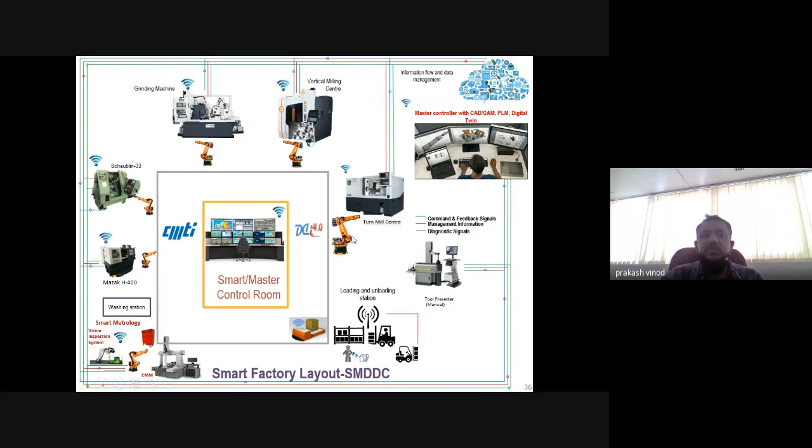Apart from that, I was mentioning that we put the entire thing on a digital twin, meaning all the machines and every asset we have also have their digital twin in virtual mode. This means we have a virtual factory also, and that information goes to the digital twin part as well.

With this, we are looking into manufacturing digital twin, and we can do some analysis and learning from these physical things by going into digital mode. We can also create a performance digital twin, using which we can predict what is going to happen with these machines' performance.

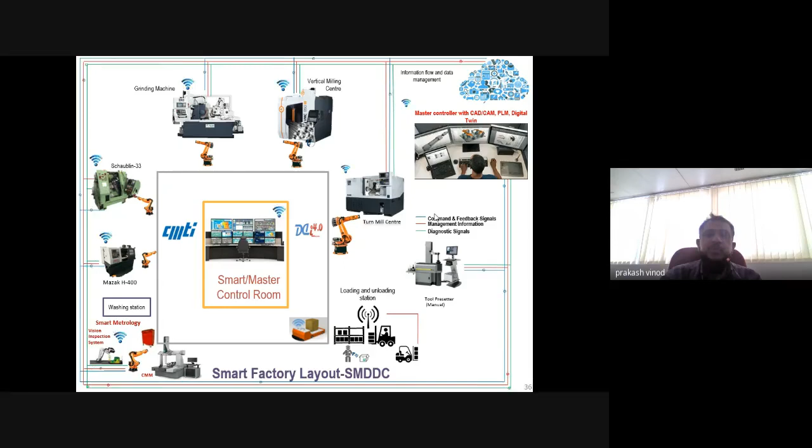So that's the way we have been working - it is not just a connected smart factory, we are also trying to have a digital twin. This is basically a cyber-physical smart factory we are trying to build at our center. That is the way we are looking into it.

Now let's look at some of the work CMTI has done.

It is available on cmti-iiot.online. If you click, you can see a lot of things here. It is basically some modules which are for academic interest as well as for demonstration purposes. Some modules don't have everything, but we have kept some basic things there for people to see and look into how it works.

So some of the things we have done is developed technology for converting legacy machines to smart machines. That module is there in this.

Then we have an energy monitoring solution for MSME we have done - a low cost, IIoT based energy monitoring solution for small scale industry. We developed the hardware also. Using low cost sensors and electronics development at CMTI, we are able to provide solutions for just a few thousand rupees that people can use for their machines. This is both hardware and software and dashboard development, IoT based, which we have done in this process.

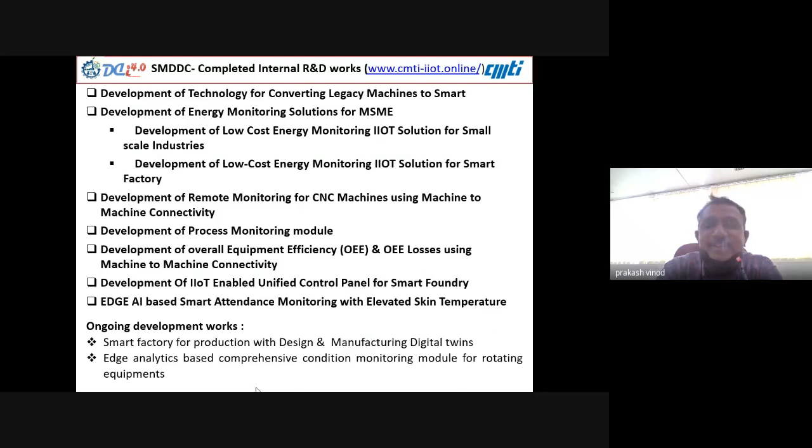Okay, thank you sir, thank you very much sir, for your valuable time. Yes sir, yes sir. Yeah, it was a privilege, and I am honored actually.